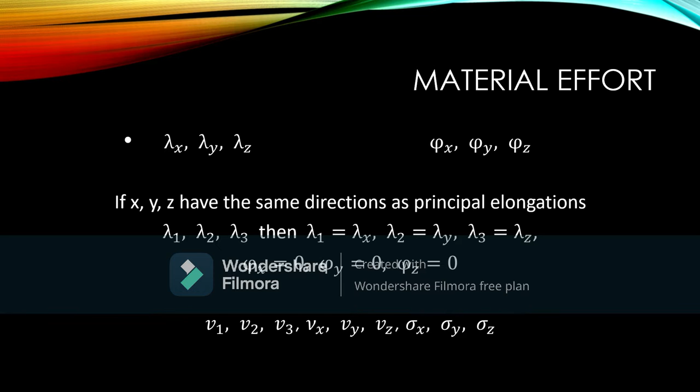Thus, a certain function sigma of principal elongation and angles of shear in arbitrary mutually perpendicular directions would be a measure of material effort. Since every state of strain is related to a uniquely defined state of stress of the said element, sigma is also a function of 3 principal stresses, V1, V2, V3, or respectively normal, Vx, Vy, and Vz, and shear sigma x, sigma y, and sigma z.

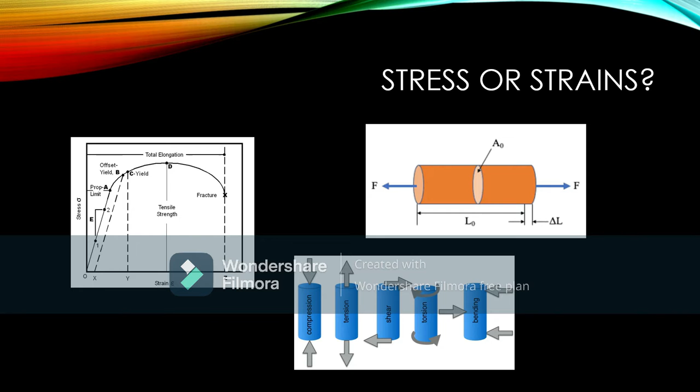Probably the most long-standing issue with failure criteria is whether they should be expressed in terms of stresses or in terms of strains. The discussion goes back to the very beginning and continues even now. For example, some aerospace organizations specify design procedures in terms of stress, while some others use strain. Typical technical exchanges on the subject remain inconclusive. Still, the uses of failure criteria are manifold, and everyone is left with the problem of making the best possible choice.

Drucker-Prager failure criteria. The Drucker-Prager yield criterion is a pressure-dependent model for determining whether a material has failed or undergone plastic yielding. The criterion was introduced to deal with the plastic deformation of soils. It and its many variants have been applied to rock, concrete, polymers, foams, and other pressure-dependent materials.

The Drucker-Prager model has been used to model polymers such as polyoxymethylene and polypropylene. For polyoxymethylene, the yield stress is a linear function of the pressure. However, polypropylene shows a quadratic pressure dependence of the yield stress.

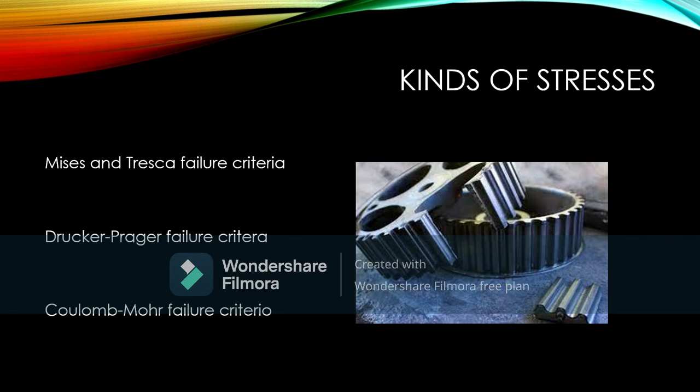Mises and Tresca failure criteria. The main interpretation of the Mises criterion is that it represents a critical value of the distortional energy stored in the isotropic material, while the Tresca criterion is that of a critical value of the maximum shear stress in the isotropic material. Both criteria are widely discussed in many places. Historically, the Tresca form was considered to be the more fundamental of the two, but the Mises form was seen as an appealing, mathematically convenient approximation to it. Now, both are usually stated side by side with little or no preference.

The two criteria are specified below in principal stress space. Both are one-parameter forms, specified by either the uniaxial tensile strength T with C equals T, or the shear strength S. Mises criterion, critical distortional energy, the equation at the top, where C equals T and S equals T over square root of 3.

Tresca criterion, critical shear stress, the equation which is in the bottom right of this slide. The three separate forms above come out of the maximum shear stresses in the three principal planes. Both of these single property criteria can be calibrated on either T or S. And two figures below for biaxial stress states calibrate both criteria on T and then on S.

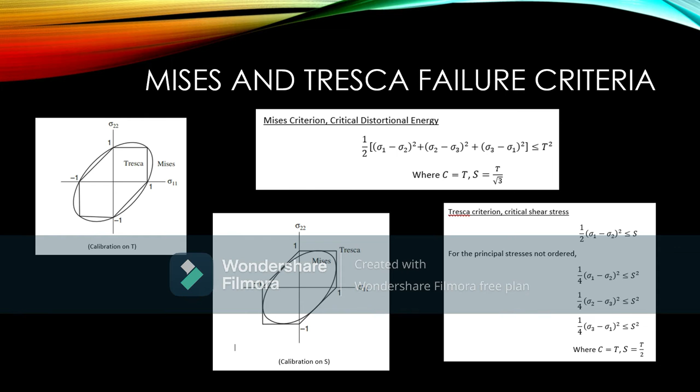This is consistent with the fact that the Tresca criterion is the limiting case of the two-parameter Coulomb-Mohr criterion, which itself is only of historical interest. And as discussed, the Mises criterion is the limiting case of a viable, completely general modern failure criterion.

Drucker-Prager failure criteria. The Drucker-Prager theory was probably motivated by the desire for a general theory that would reduce to the Mises form in the limit, rather than the Tresca form. A course of action to accomplish this is quite direct. Simply replace the Coulomb-Mohr six-sided pyramid in principal stress space by a circular cone. Following this direction, write the possible failure criterion as the equation of the top right, where Sij is the deviatoric stress tensor involved in the Mises criterion.

But now the term explicitly brings in the mean normal stress effect, which is implicit in the Coulomb-Mohr formalism. Parameters A and B are to be determined such that it predicts uniaxial stress failure at the tensile value T and the compressive value C. It is easily shown that this gives us the equation of the middle left. Finally, writing in terms of components gives the equation below that.

As shown, only the positive sign is associated with the square root; its form in principal stress space is that of a conical failure surface. The symmetry axis of the cone makes equal angles with the three principal axes. When T equals C, the failure surface becomes the circular cylindrical form of Mises. A simple example shows the inappropriateness of the Drucker-Prager criterion for representing materials failure. Take, for example, the case of cast iron, which has T divided by C equals 1/3.

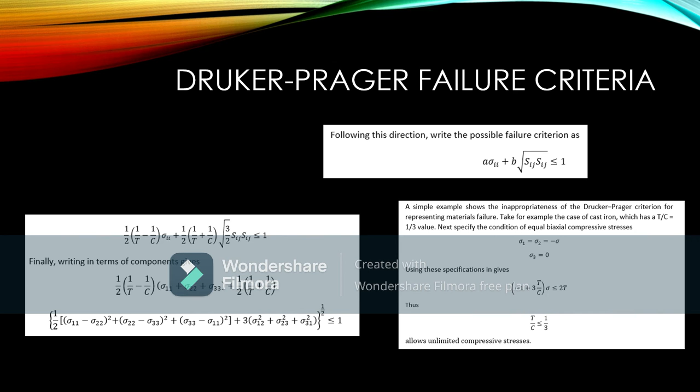Looking at the failure theory, it predicts the failure stress in equal biaxial compression as infinite for T divided by C equals 1/3. Clearly, the Drucker-Prager criterion is not suitable as a failure criterion for engineering materials. The general difficulties with the Drucker-Prager criterion, as well as with the following Coulomb-Mohr criterion, are discussed in Christensen. Like the Coulomb-Mohr form, the Drucker-Prager form receives attention and usage, though not to as great an extent.

Coulomb-Mohr failure criteria. The procedure for the Coulomb-Mohr or Mohr-Coulomb theory uses the Mohr circle construction as shown in the figure on the left.

On the normal stress sigma versus shear stress tau axis, plot the circles for uniaxial tension and compression to failure as shown. Then two linear failure envelopes are taken as just being tangent to the two circles. In order to evaluate the safety for any given three-dimensional state of stress, the maximum and minimum principal stresses are used to form a circle on the plot. If this circle is inside the failure envelopes, then there is no failure. Otherwise, there is failure of the material.

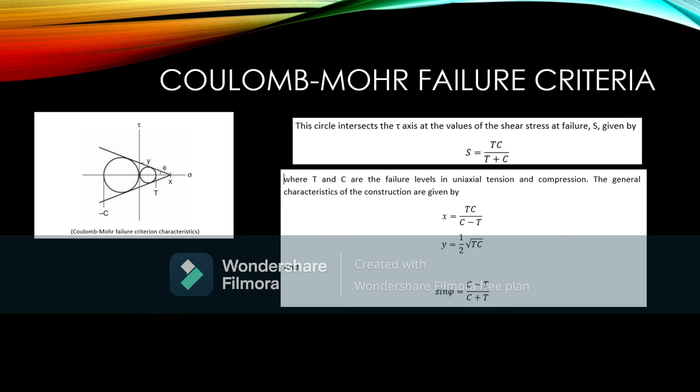For example, take a state of simple shear stress. Form a circle with its center at the origin and just tangent to the failure envelopes. This circle intersects the tau axis at the values of a shear stress failure S, given by S equals TC divided by T plus C, as is shown in the slide, where T and C are the failure levels in uniaxial tension and compression. The general characteristics of the construction are given by X equals TC divided by C minus T, Y equals one half the square root of T multiplied by C, and sine of phi equals C minus T divided by C plus T.

This extremely simple form constitutes the entire two-property Coulomb-Mohr failure criterion. In the limit of T equals C, the Coulomb-Mohr form reduces to the maximum shear stress criterion of Tresca in principal stress space. This is given by the infinite cylinder of hexagonal cross-section. When T is not equal to C, the Coulomb-Mohr form becomes a six-sided pyramid in principal stress space, and this six-sided pyramid has but three-fold symmetry rather than six-fold symmetry.

An analytical form for this criterion in terms of invariants has been given by Shachar, although it's far easier to directly use the forms given here. The Coulomb-Mohr theory has been used in applications as diverse as nano-indentation and large-scale geophysics. As with the Drucker-Prager example, it is not difficult to find realistic examples where the Coulomb-Mohr criterion produces blatantly incorrect results. Some examples are as follows.

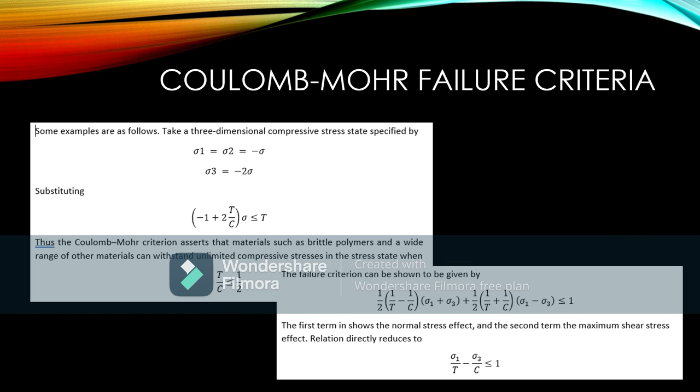It has continued to be used perhaps because of the perceived lack of a suitable two-property alternative, but nevertheless, the above examples unequivocally prove that the Coulomb-Mohr theory is fundamentally incorrect and should never be used, even though it is widely disseminated and codified.

Conclusions. Of the four standard and widely used failure criteria of isotropic materials, Mises, Tresca, Drucker-Prager, and Coulomb-Mohr, only the Mises criterion is of lasting significance. Although applicable only to very ductile materials, it is the classic result in that specific application and it surely will endure. As shown, the other three criteria fail to establish the credentials necessary for permanency and in fact can be misleading and patently incorrect in particular materials applications.

Worst of all, none of the four can be used as general purpose failure criteria as they are completely inappropriate to the task. Furthermore, it is probably obvious that adding another parameter or two to the Coulomb-Mohr or Drucker-Prager forms would be exceedingly unlikely to convert what is a completely unacceptable form into a transparently successful form. A totally new and fundamentally different approach is clearly required.

Although the results do not lead to any useful general failure forms, they do provide a hint of where to look for opportunity. In particular, the Coulomb-Mohr criterion is completely linear in the stress components and is unacceptable. Other linear and quasi-linear forms, such as the Drucker-Prager criterion, are also unacceptable for the same reason. It is probable that the general failure theory would involve some nonlinear physical effects in some manner.

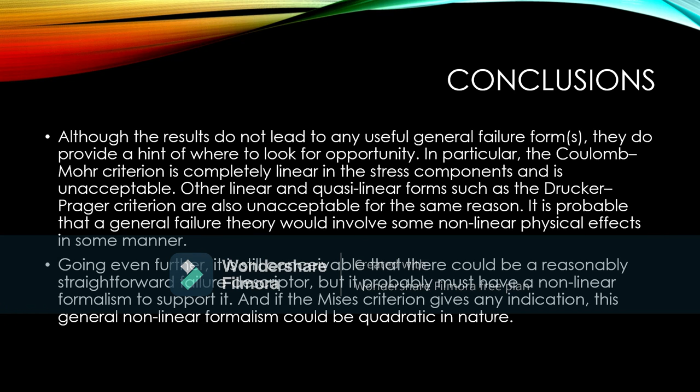Going even further, it is still conceivable that there could be a reasonably straightforward failure descriptor, but it probably must have a nonlinear formalism to support it. And if the Mises criterion gives any indication, this general nonlinear formalism could be quadratic in nature.